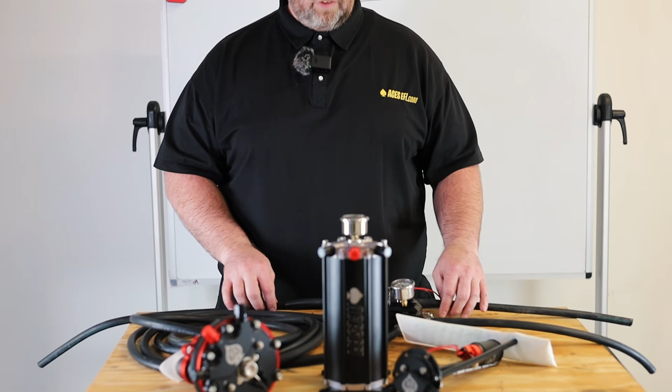We are talking about the fuel system part of this whole thing. Instead of just talking about the one that's in the Blazer, I want to go over all the systems we've got. So I want to give you this introduction, talking about all the different fuel systems we have and what we plan on doing in this video series. We're going to chapter it out to cover each one of the systems we offer here, and hopefully that helps you out.

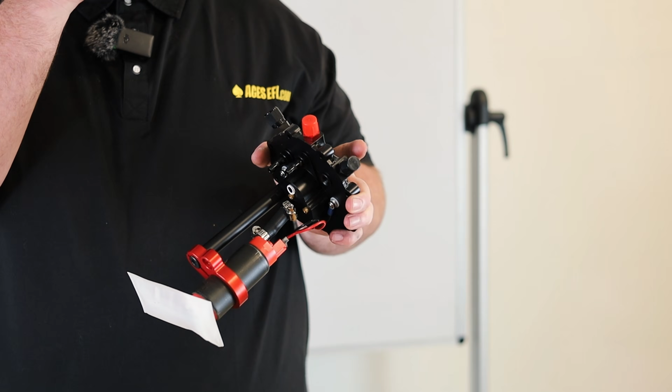The return lines as well. So we have one right here for vent, which doesn't have any kind of adapter on it. We've got the one right here that's kind of like a return situation, and then we've got the other return right here. So if you're using it in a different configuration that requires this return port, then this would be the return. So a lot of flexibility in this.

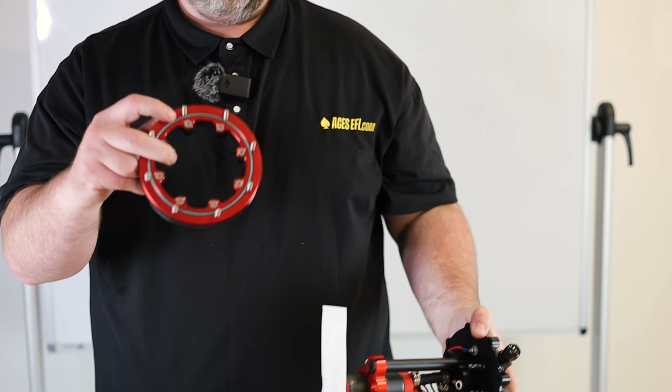With this system right here, you're going to cut about a 4 1/8 to 4.5 inch hole in the top of your fuel cell. This is really designed more for fuel cell applications, or if you have an old steel tank and you want to do the modification, you can just cut a big hole in the top of your tank, but you have to use this ring right here. This is the mounting ring, which, as you can imagine, goes up on here, seals to the bottom of it with this nice green O-ring, seals up real nice.

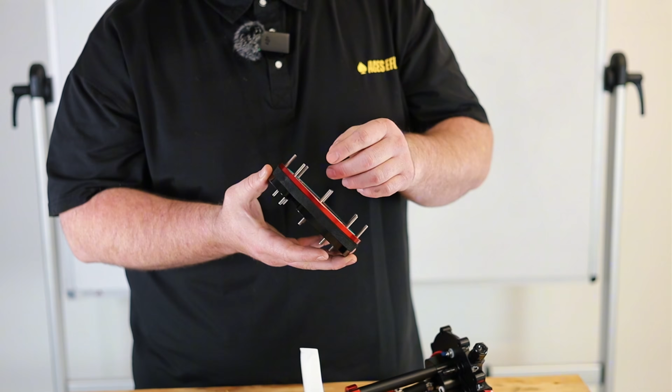Then it has this closed cell foam in here, kind of like a neoprene type material. So there's this ring right here that goes inside the tank. You can see it split, so you can actually get it down in there. You put the foam on top of it, make sure all the studs go through, no problem there. And then you go through and work each one of these bolts in with this right here to capture the top of the tank.

Now it can warp a smidge when it comes to the corrugation on top of the fuel cell itself. Like if you've got a stock factory tank, it has that little look like the bed of a truck back there kind of. But yeah, it can bend to that and seal up pretty nice.

So you'd mount this ring into the top of your fuel cell, and then you just install your pump through it, no problem, just like that. Put a few captive nuts on there, not a big deal. They have anti-rotation devices, so they're not going to shake themselves loose or anything over time. But you get it mounted in there, you get it about a half inch off the bottom of your fuel cell itself, no big deal.

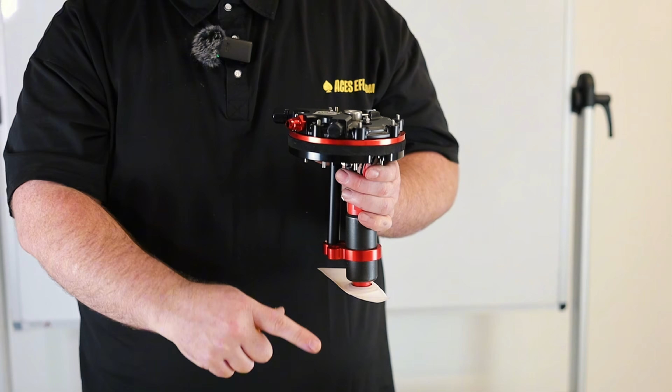And then everything else can happen. So you can go from this piece right here, straight out of this pressure port, which is regulated to 58 psi. No need for a return because it does it all internally. Hit a filter, go to your fuel injection system, and you're set. You need a little bit of power, but this thing only runs about 9 to 12 amps-ish.

You can actually run our system directly to this, ground it appropriately, and you're in business. This is simple. The biggest thing you have to do is get the depth right and cut a hole in your tank. Other than that, not too difficult.

You notice there's not a lot of stuff that comes out of that kit box. We didn't bring the whole kit boxes because we already have some line for our 255 system and our tight-fit tank system as well, which we'll go over later in this video.

When it comes to the fuel system itself, you're going to have your fuel cell right there. You're going to have this in-tank module oriented about right there, coming down. There's a fuel pump itself, the sock filter, and your fuel level. This is 0.5 inch right through here. That's about how this is going.

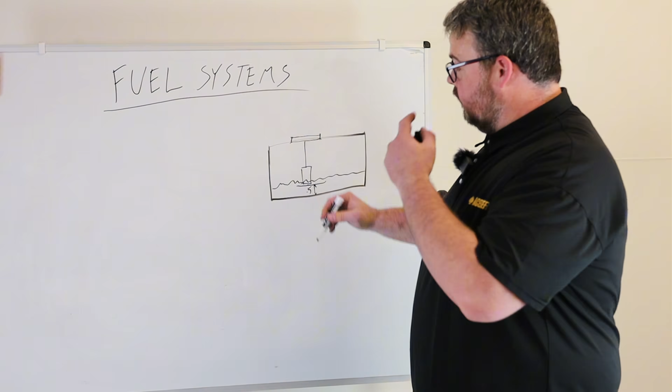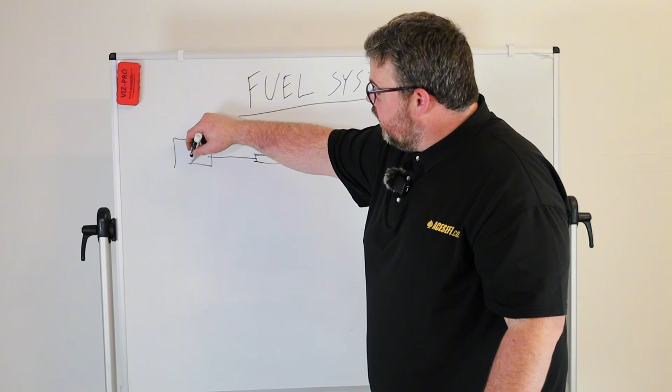Then you've got your pressure line that's going to run out of here, hitting about a 10 micron filter. The sock filter already on here counts as your pre-filter, before the pump, taking all the rust and debris you'll get in your fuel system over time. So we've got our 10 micron filter here, and then it's going to go off to your fuel injection system. Whether you've got a throttle body, fuel rails, or what have you, you can deadhead this whole system into your throttle body. So, TBI, there we go. We'll just say it's a kill shot, no worries.

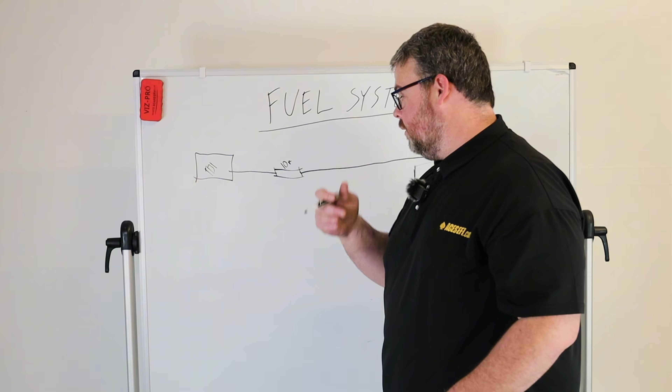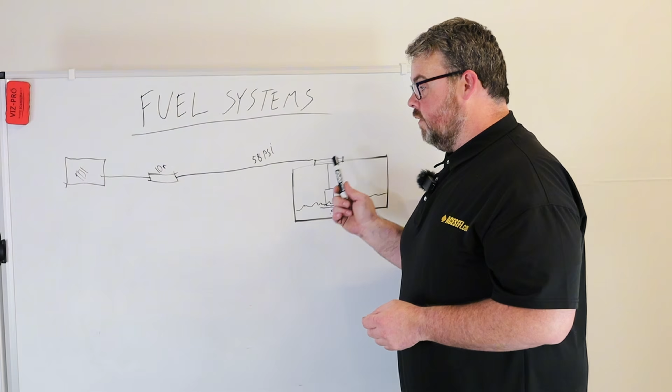This right here is going to be running at 58 PSI. Some of our systems are already preset for 58, some you have to adjust in the handheld. Really easy, under the fuel selection tab, you just go into basic, find injector rated pressure, adjust accordingly, and the system will take care of the rest for your fuel pressure needs. So this is easy, from one point to the next, good to go.

No worries. There's not a whole lot of other mysteries with this particular system because it is so easy and basic, other than you've got to cut a big hole and get the depth right, and make good selections for running your fuel lines around your vehicle. Up next, I'll be talking about the Fuel Command Center, which is this thing's big brother in a way. Let me go grab that real quick and we'll get to talking about it.

So anyhow, we are back. A friend of mine commented and said he didn't like my plywood table. Look at my plywood table, it's to hold things, this is great. We're in a shop, I'm explaining things. It's not really the focus, is it?

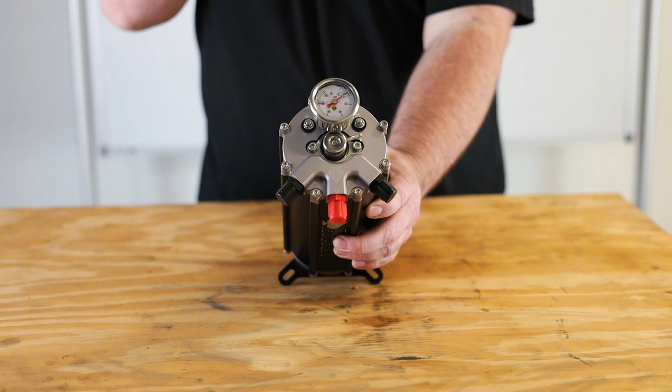But we're back about the fuel systems here. We already talked about the conversion module, which is fantastic, a huge fan of that. But now, if you shrink one of those up just a smidge and give it its own fuel tank, that's exactly what you get in this right here. You can see it's just got hold down bolts, and if you take the top out of this thing, it looks just like the conversion tank.

So you still get the return if you're going that direction. You still get the pressure, you still get the vent, all that stuff. It's whatever you want to be doing. But this thing has a few extra bits and pieces that I like quite a lot. You can mount it under the hood like this, standing up, looking good, running this off to your fuel injection system. This side or this side, whichever you want to do. You'll run it from your mechanical pump or an inline electric pump off your original carbureted setup into this to fill this tank up, this surge tank as it is.

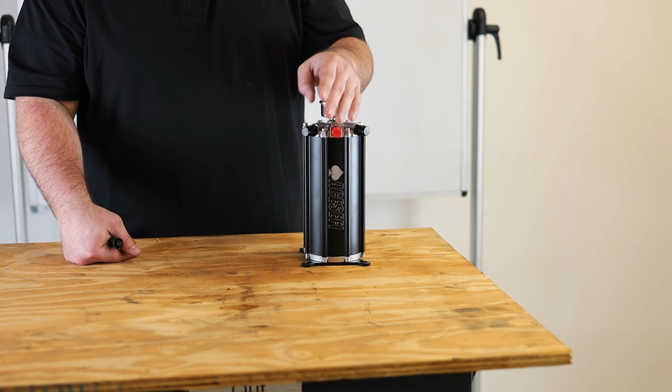You fill this thing up, it takes the fuel pump inside, which I believe is a 340 liter per hour, really spicy pump, puts 58 PSI out to your throttle body or fuel rails, no problem. Then you'll have a return on this side or this side, depending on how you have it set up, back to your fuel tank, because this is just going to be feeding fuel in and it needs somewhere to go. This is going to take exactly what it needs out to go to the throttle body at a higher pressure, because it may be 7 to 14 pounds coming in here, 0 to 5 PSI coming out of here depending on tank restrictions and whatnot, and then 58 PSI coming out of this right here on this red one, this pressure port.

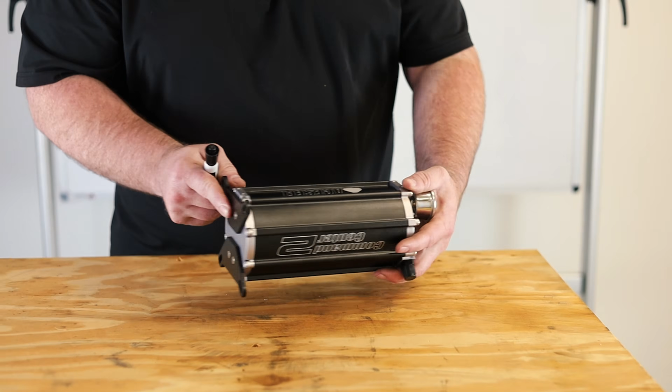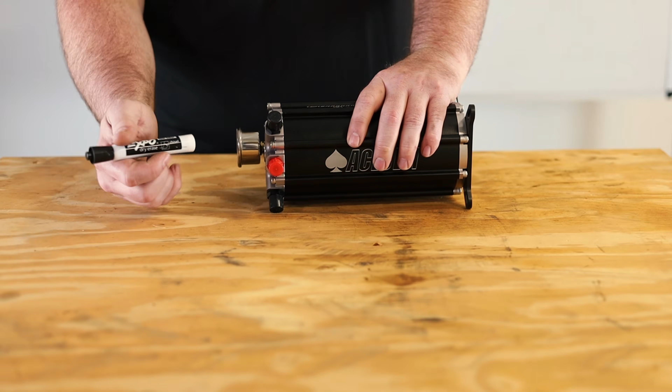You can mount them vertical like this, which I'm a big fan of. But because of the bolts in the back, you can take the feet off this thing, unbolt them, put them here, and mount it horizontally if you're real limited on space. The only thing to consider is this is still your pressure and fuel feed to fill the tank, but whichever one is the highest point needs to be the return, whether it's this direction or that direction. That's the biggest consideration.

Also, if you want to get real fancy, depending on the location, you can take this gauge off and put a fuel pressure transducer in there, get all your fuel system pressure, and feed it right into your Killshot or your Jackpot or whatever you're running. Then you just use the gauge somewhere else if you want to. And it's got a really cool Aces logo in there too, I like that a lot.

Usually when I take these out when I'm doing an install, I just kind of keep them in my drawer because I like them. It's just a thing I collect. It's really weird, I know.

But there's that. Also, I didn't mention this in the last one, but this one still has a boost reference port, the 1-to-1. So if you're running this with a boosted application, you take a reference line off your throttle body or intake or whatnot, and run it to this, so every 1 PSI of boost pressure gets you 1 more PSI of fuel pressure out to your throttle body, keeping the injectors nice and even as it goes.

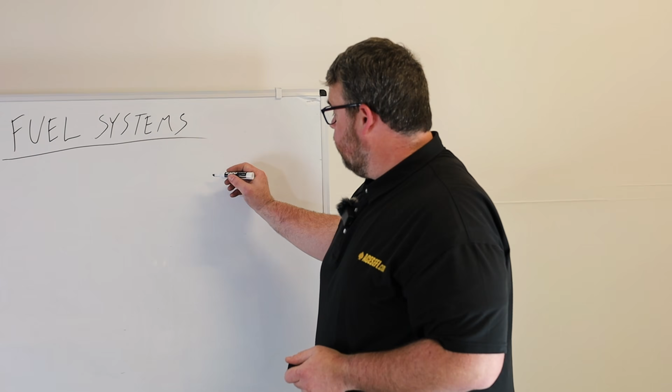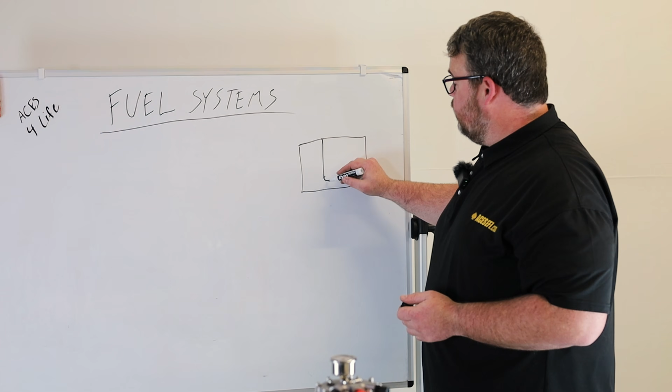So we're going to have your fuel tank. This is your factory fuel tank right there. You're going to have a line coming in, so this down here is going to be your pickup for the fuel tank itself. It's going to come out and go to your engine. That is a very square engine.

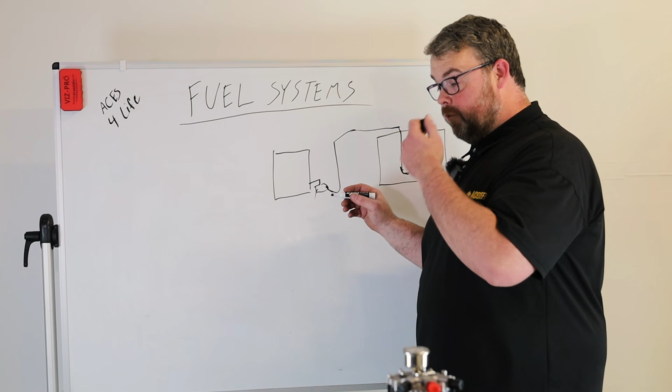But anyways, on the side of your engine there's going to be a mechanical fuel pump, with a few lines coming off of it. This goes in here, and normally the mechanical fuel pump off the engine will go back up and supply the carb up here, supplying it with about 7 through 14 PSI of fuel pressure. Because we're getting rid of the carburetor and going fuel injected, we're going to get rid of the carb and add some EFI on top of it.

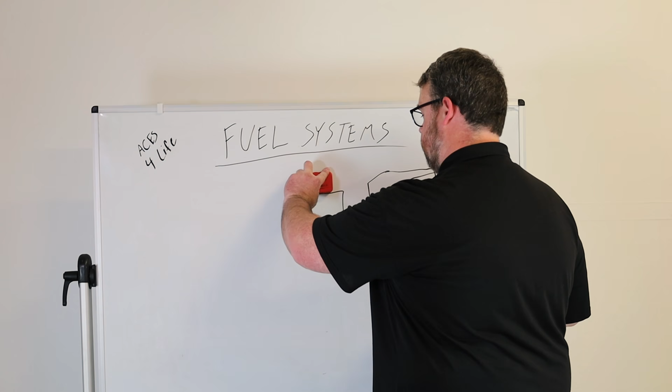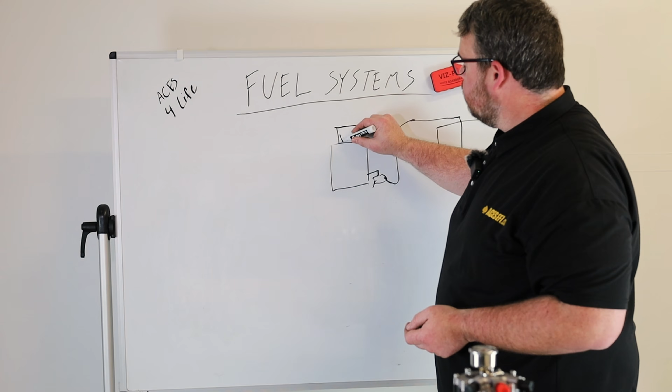Finest of artwork. Anyway, so now we're going to put EFI on top of this thing. Let's say TBI - that's going to be my generic term for anything ACES fuel injected related, unless we're talking about the Jackpot, which then we can just add some fuel rails to it.

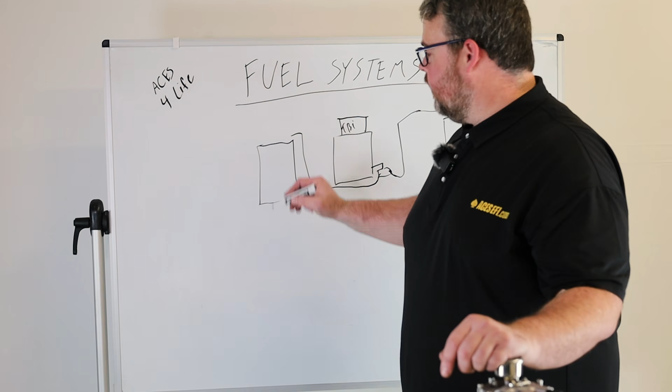Same principle applies: you're going to have 58 PSI coming out of this. So you go from your tank to your mechanical pump, and it's going to go over here to the surge tank. That is this guy right here, exact, right - it's the same shape.

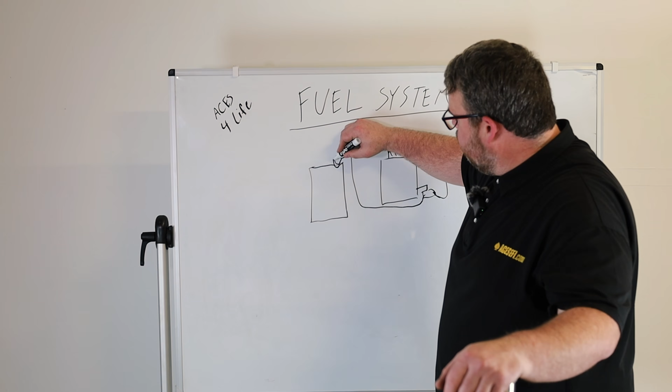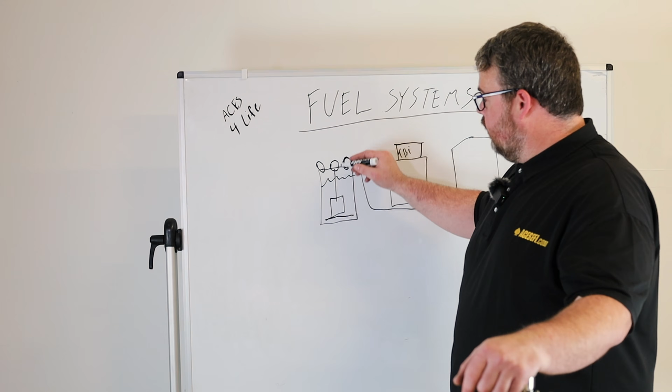We're going to have one port over here, a port right here, and a port right here. This one is going to fill this tank up at 7 to 14 PSI - just free-flowing fuel in there, no problem, doing a good job. And then the pump inside here is going to have a little sock at the bottom too, picking this fuel up and increasing it to 58 PSI.

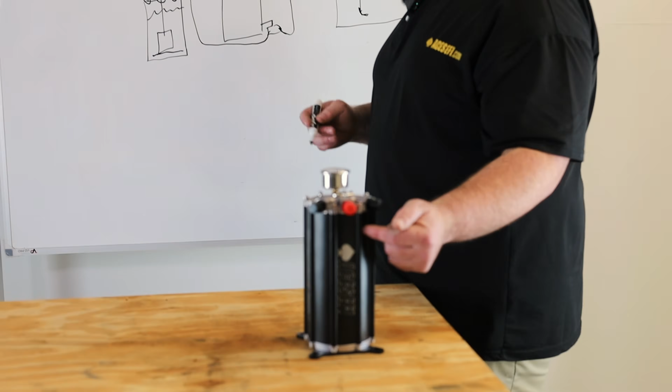And it can go deadhead because it has the regulator built into it - any return action it does is internal. So it's going to have like a weird combination of a bypass regulator inside of this thing, that's the regulator right here on top. That guy.

So anyways, we got 58 psi going back to the TBI unit. No problem, set it up in the handheld. We got a Kill Shot Classic, it's already set for that. We got a normal Kill Shot, we have to adjust it a little bit. We got a Jackpot, we got to adjust it a little bit.

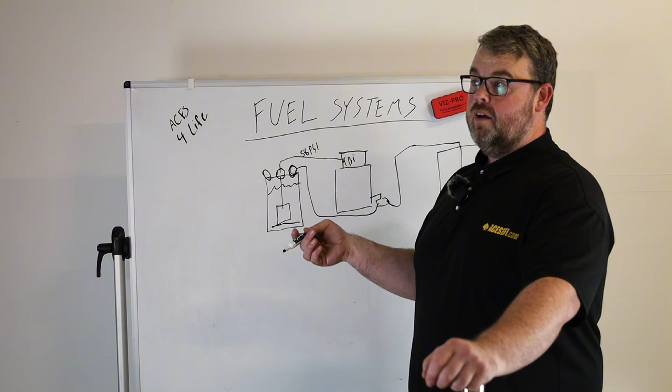Not a big deal. Even if you don't adjust it, it's only a marginal difference in fueling, which it will learn out eventually. It won't change the pressure for you, but it will compensate the fuel in the right areas, if that makes sense. But anyways, we got the return. The return is going to come out, and it's going to go back to the tank, preferably somewhere low in the tank so it doesn't cavitate the fuel.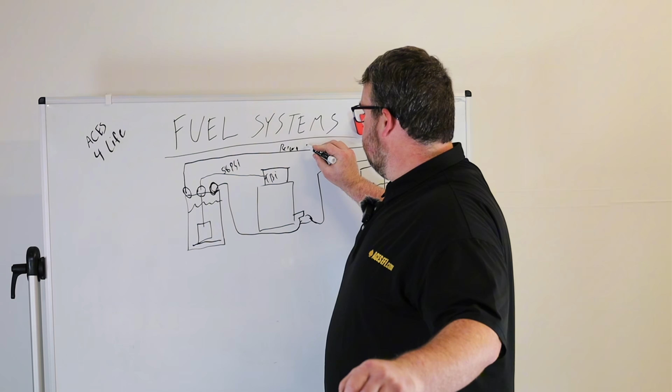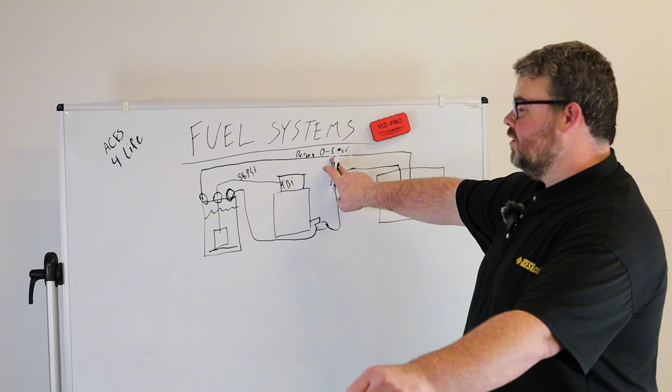I'll even put little wavy lines in there. This right here is return, and it should be nowhere beyond 0 to 5 psi of restriction. Sometimes people will put these things in and it'll act real funny and do stuff because they have like 30 psi of restriction on the return line because they took it to the wrong port over here, which is a rollover valve. It kind of turns into a really neat shower inside, but has a huge amount of restriction. So even though there's a big 3/8 line on top of your fuel tank, make sure it's not for a rollover valve, because that will, weirdly enough, make it run funny and give you a little bit of a headache doing the setup. But hopefully that makes sense.

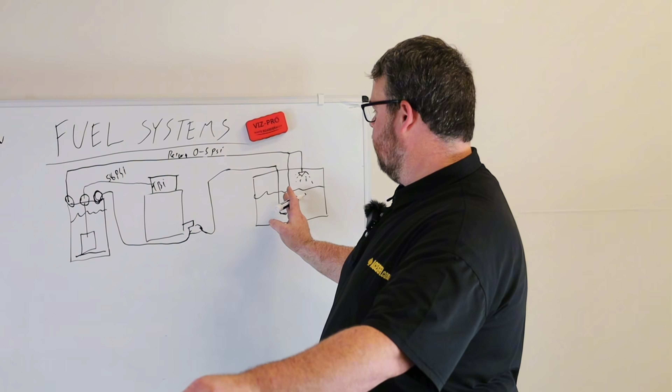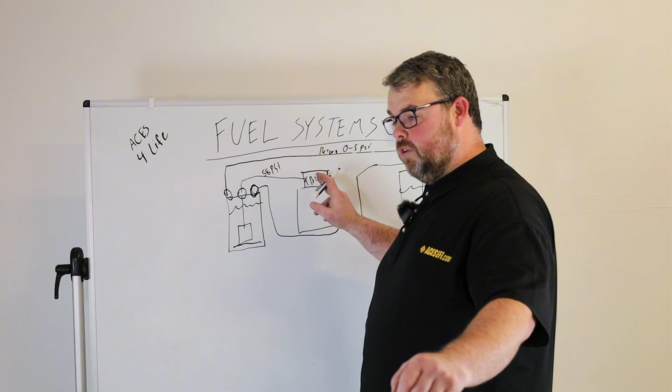Your factory fuel system up to your mechanical pump, no problem. It could be an inline electric pump, also not a problem. That's going to feed this and fill the surge tank up. It'll get regulated to 58 psi that goes off to your fuel injection system, and the return line goes right back to the tank. It runs under the same amperage range, about 9 to 12-ish amps, so not a problem. You can hook your orange fuel pump wire right over here to the positive leg, and you can take this and ground it, preferably to the battery if you don't mind, but a good ground source, and it'll sit there and do its job. So with that, that really sums up everything that's going on with this particular unit.

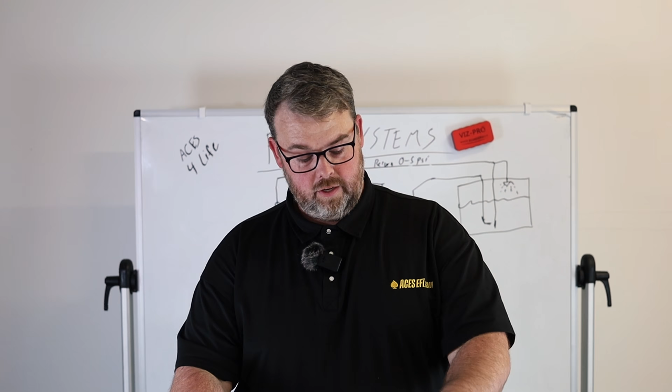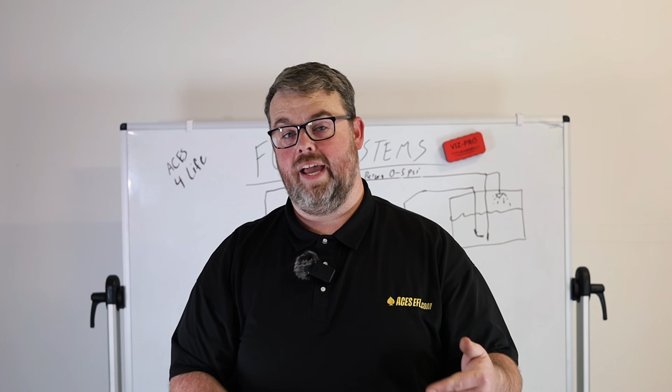There's not a lot of extras. There's no weird mysteries about it. It just, if you got it horizontal, you need to make sure there's a port that's going full return back to the tank that's the highest point. Otherwise, it'll get a little bit of air in there. That's it. Everything else is pretty easy.

I've seen people mount them on frame rails. I've seen people put them horizontal or vertical on firewalls and a bunch of other really weird spots. I even seen somebody put one in the trunk of their car and then run a line all the way to the front of their vehicle, which they had no issues with. So they kept it all real tidy back there in the trunk, which if I was doing that, I'd just go with the fuel cell and use the other kit.

But hey, it's up to them. They're going to be doing this. It makes more sense to them. Let them do it, it's totally fine. We're just here to support it, give you as much information as we can about it.

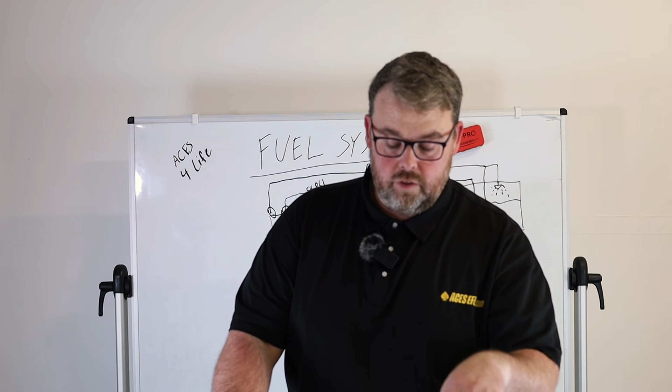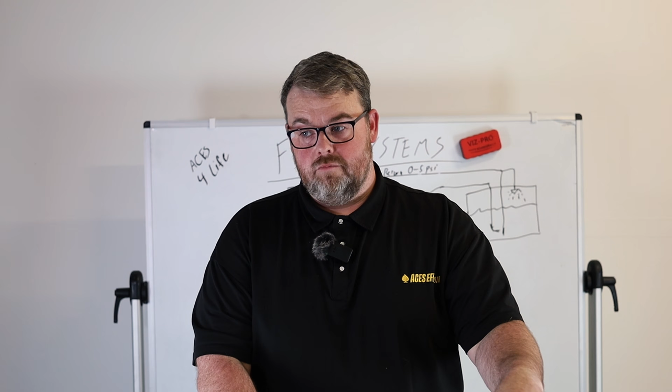Really neat thing is if you take the top off of this to inspect it, to maintenance it or whatever, it doesn't void any warranties removing these screws and taking the top off. So that's a huge benefit. We're not going to be like, oh no, you touched the screw, we can't warranty it for you. It's like, oh hey, I took it off and I found this issue, or I found this thing, or what can I do about this? Because later you may decide to put a bigger fuel pump in here, modify it accordingly, and put the lid back on it. And that's up to you to do if you want to.

So it's just a normal old in-tank fuel pump is the normal size. I mean, you really want to measure the diameter, but yeah, we give you guys a little bit of freedom with this unit. Big fan of it.

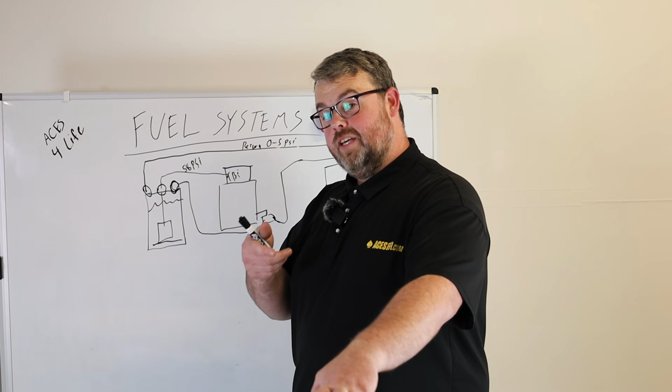So with that, if this is making sense, if I explained it well, let me know. If I didn't, let me know. And I can always come back and do either a reshoot of this section of the video or just make a more in-depth explanation of what I got going on here. But hopefully we can film in the future a lot more examples.

Hopefully I'll get the chance to do an install video on one of the ACES test units, showing how I like to hook it up and some of the things I go through when installing these. So we'll get on to the next portion of the system.

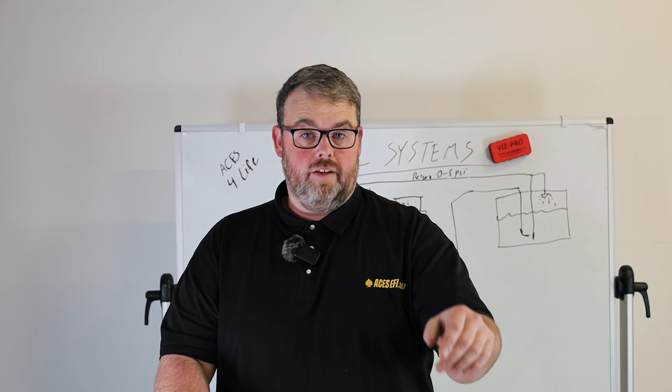It's time to start talking about fuel pressure regulators, lines, and inline fuel pumps. So hang out with me for a few, we'll get into Segment 3 of this fuel system video. I'm so excited to be making these things because it's information that people need, and it's epic. It's not often that I get the chance to just sit around and explain this stuff, other than in-house and a couple short YouTube videos.

But let's get to talking about the tight-fit in-tank fuel pump. If you've got an EFI aftermarket tank for your 1972, whatever it is, it's going to have 6 bolt holes in the top of it - see that guy right there? It's the same bolt pattern as the majority of EFI conversion tanks out there. So you should be able to get one of these for your conversion tank, figure out the depth, cut these things appropriately, get the hose just right, and just send it.

This is also one of those nice closed-cell technology sock filters, so it does a really good job of not collapsing and not getting clogged up too much. And since it's in the fuel in a few different spots, it can actually pull the fuel through nicely without starving the pump when you're super, super low on fuel.

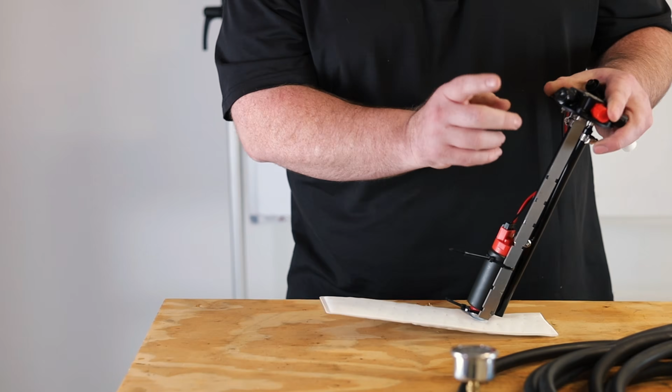This thing right here doesn't have an internal regulator because there's not enough room in the top of it, but we did throw some options in. On this side we have the return, which comes with a nifty little cap. Over on this side we've got the vent. We keep an AN cap on there because some people already have a vented cap or some other means of venting their system. But if you don't and just want to get an AN fitting and a bit of fuel hose to run as your vent, you sure can do that.

Also, this is the pressure out. It picks it up from the bottom of the tank, depending on your depth - like 12 inches like this - and sends it out. This is full authority of this particular pump. This is a 255 liter-per-hour pump, your standard issue in-tank 255, good for EFI up to about 600 horsepower. All these fittings are -6 AN on all of our stuff, so that's keeping it fairly universal - 3/8 line or a -6 line, -6 fittings.

These are ORB on this side and AN on that side. If you ever have a different fitting you wanted to put in here, not a big deal - it's just an ORB, O-ring boss, that's what ORB means. This thing right here has already got the pre-filter in. You need to get a 10 micron post filter as close to your fuel injection as possible and run it through.

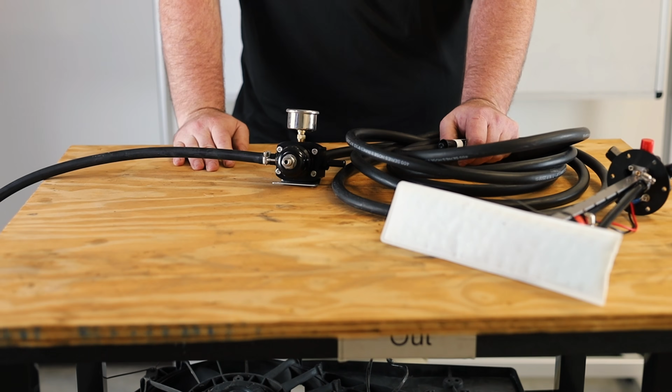So I have a bit of hose here - let me put this down - and a regulator. This seems to be a bit of a thing for a lot of folks, getting the regulator set just right. Let me push my cart around a little bit and really help the camera guy focus. Anyways, so for instance, you see this long bit - let's get it flipped around correctly.

This long bit of hose right here is actually coming out of the return. These ports on this fuel pressure regulator - it's adjustable and has boost reference. It has a 1/8 NPT threaded area right here for the gauge, or our fuel pressure transducer. Actually most pressure transducers on the market will also thread into this as long as they're 1/8 NPT. Not a big deal, right?

So anyways, let's see - no, I actually tightened that one, I was going to unscrew it for you. But you can have pressure coming in here, or pressure coming out of here, or pressure going in or out on this side - these are I and O on each side. So depending on how you've got it arranged, as you can see, this was set up in a return style. So in a return style, that would be fuel pressure coming out of the pump, going through the filter, through the rails, through the throttle body, or whatever setup you've got.

Like if we was to do it on the Blazer, it would go through the rails and then come back through this line right here to a regulator, which will be the restriction in the whole system, where you adjust your fuel pressure at. If you want 43, you adjust it for 43. You want 60, you adjust it for 60. I made a tech short on this recently about adjusting this.

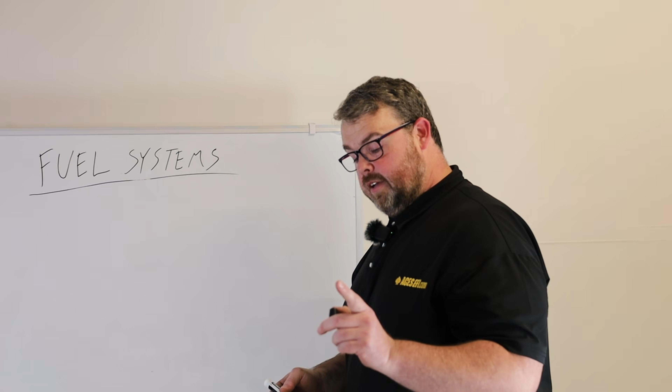Now, if we were going to draw that out, I'll do that. I'll just draw it out, then I'll erase it, and we'll go on to the next configuration of it. Too easy, right? So we got in-tank fuel. Let me draw my fuel cell right here.

We got the tight fit in-tank. We got fuel pump right there. We got that right there. Fuel pump, FP, right there. Anyways, we're going to be coming out of the red one, which is going to be putting fuel out, so we're going to go this direction. There's going to be another filter. This is that 10 micron right there.

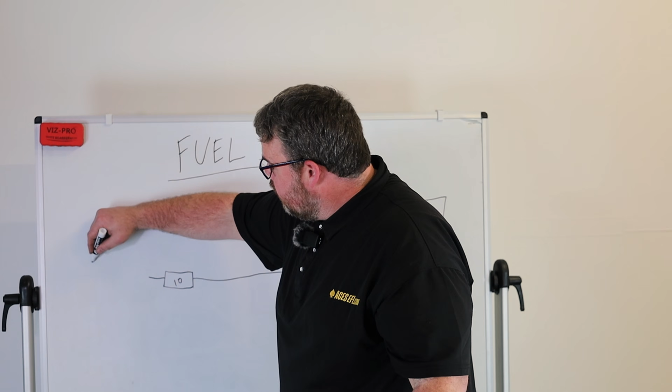And we're going to go into, let's draw fuel rails this time. I want to have a little bit of fun with this because I'm such an artist. We're going to have fuel rails right there. There's going to be a crossover connecting them. This actually looks more like a spaceship than anything else, but it is what it is.

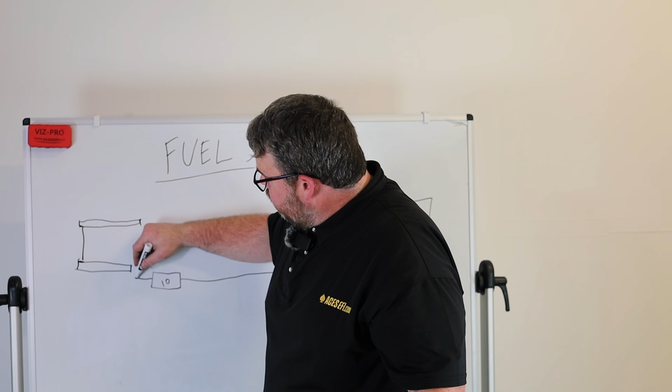So our fuel system will go right here. The fuel is going to go through this system, this direction. It's going to go through the crossover. It's going to come back through the other side of the fuel rails, where it's going to encounter the fuel pressure regulator, FPR.

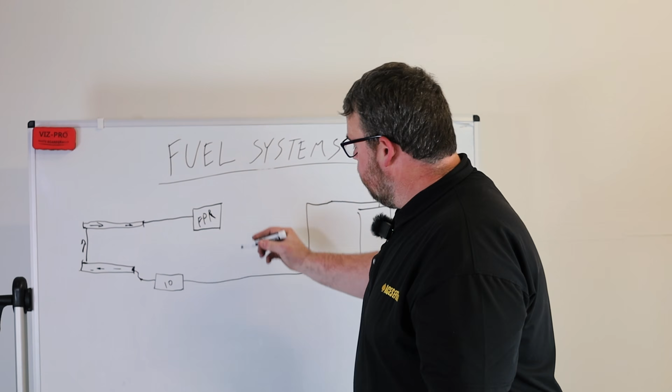There we go. So this side right here is blocked off. This one has a barb fitting in there, so you just use your imagination, really. And then our fuel return is going to come out of the bottom, and it's going to go back to the tank, to the bottom of the tank.

You want your fuel returns on these type systems to be in the bottom, because if it comes in at the top, it's going to actually just drop the fuel in, which will add some air to the system, which could cavitate your pump in a high horsepower application, cause some damage to the pump and or the system, causing fluctuations in fuel pressure. Yeah.

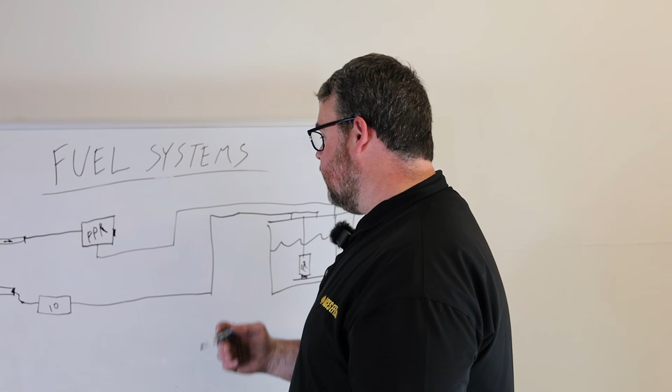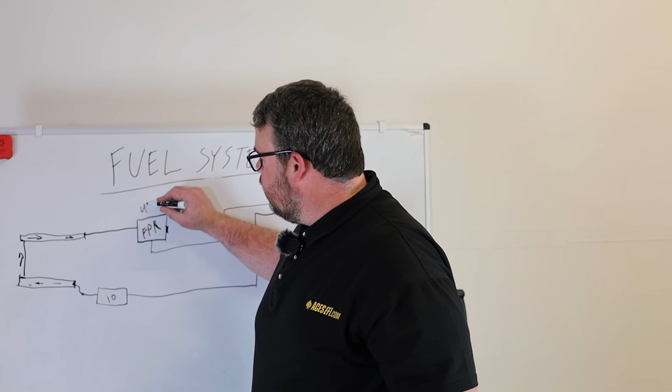But it comes out of the tank, comes out of the pump, hits the 10 micron filter, goes through your rails, comes back around, hits your fuel pressure regulator, which we adjusted to 43 psi, 43.5 psi right here. That's what we got this one adjusted to. Too easy, right? Anything else is going to come. This is the pinch point. This is a restriction, so it's going to be at 43.5.

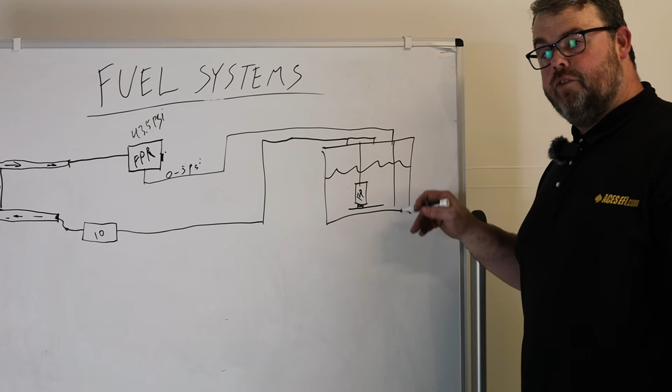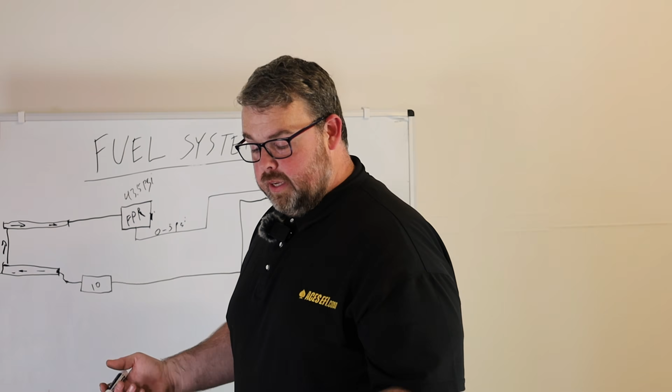Anything else is free flowing the best it can from 0 to 5 psi back to the tank, where it's just going to gently go into the fuel that's already in the bottom of the tank. They usually call this a dip tube, DIP tube, because it dips into the fuel. A lot of times people use bulkhead fittings and AN lines and all that. Whatever means of return you got is going to be good. Preferably you're returning the fuel below the level of the fuel.

That way it doesn't splash around and aerate the fuel a bit. So that's the return style right there. This is a return style setup.

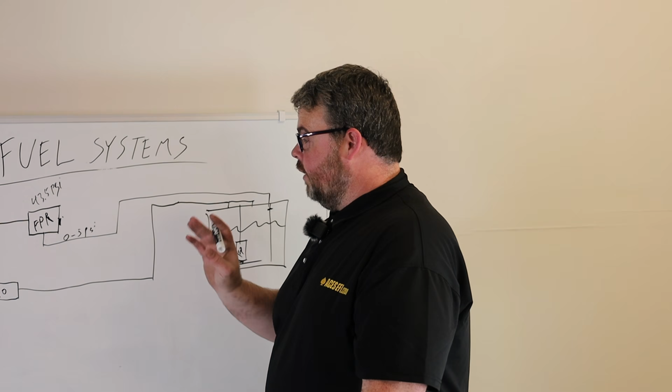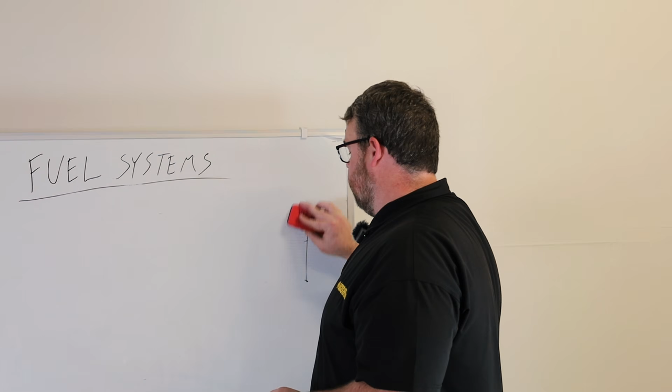We got a pretty good graphic in our manual, but the next variation of that is just a little bit different. So let me get the eraser out and I'll draw you a whole nother thing. And this actually applies not only to this tight fit, but also to the inline pump. Let me grab that inline pump real quick.

Please hold. So if you're not going with an in-tank setup, you're going to be using this setup right here. This is just inline. Actually, I got it backwards, so it goes this direction. Fuel goes that way. This right here, good, tested good. This is just one of the tester ones I had laying around. It's got some damage, but it works good.

Anyways, this applies to this and this for both of these style setups. The only difference is this one's in the tank, this one's inline. So not too different, but some folks may get confused because one's outside the tank, one's inside the tank. Principles stay the same. So with that, let me talk about the bypass return style setup.

This is a bypass return regulator after all. So when you're doing a bypass return style setup, which this is almost set up for, you'll have pressure in, pressure out to your EFI system, which will deadhead to it, and then it's regulated and goes back to the tank. So all your tank business comes up to here, and then this goes off to your system, whether it's a TBI or fuel rails or what have you not. Not a big deal. So let me draw that out real quick.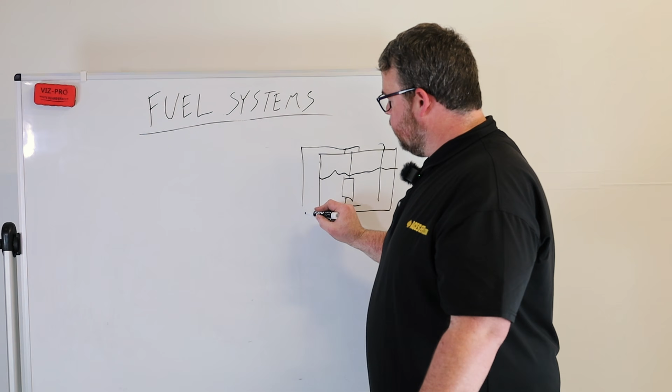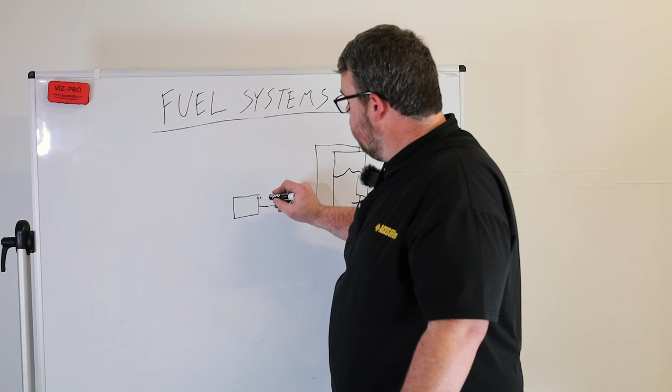And then we're going to hit the fuel pressure regulator. I want to put it right about here. So here we got the fuel pressure regulator right there. So we got the fuel coming into it just like this. We're going to have the fuel coming back out of it just like this. Let's go all the way around the fuel tank to do our return. How about that? That way I don't have to jump any lines.

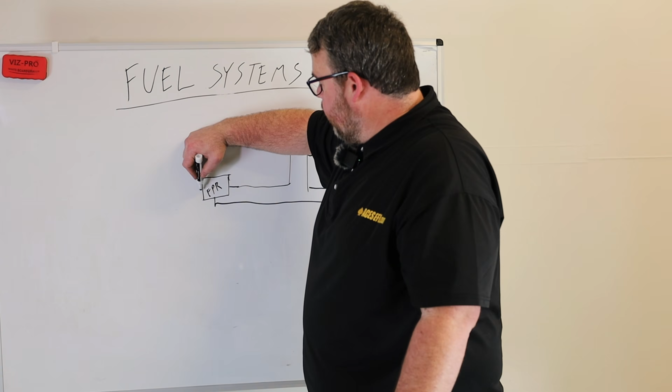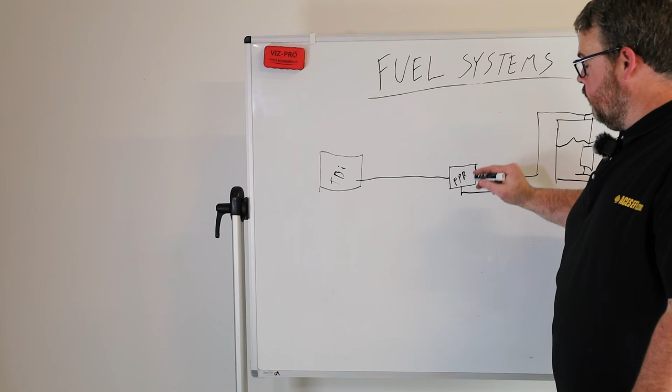So we got the supply to the regulator. It is regulated down, and then we're going to come out of the regulator to our fuel injection system over here. We're going to go back to TBI just to keep it fresh. That's deadheading into it. This line right here, because it's regulated at this bypass return regulator, is going to be 58 PSI if we adjusted it to that.

Or we could keep it at 43.5. It's up to you depending on what your goals are. This right here at this return, it's still going to be 0 to 5 PSI. And this is going to be maximum authority of what that fuel pump can do.

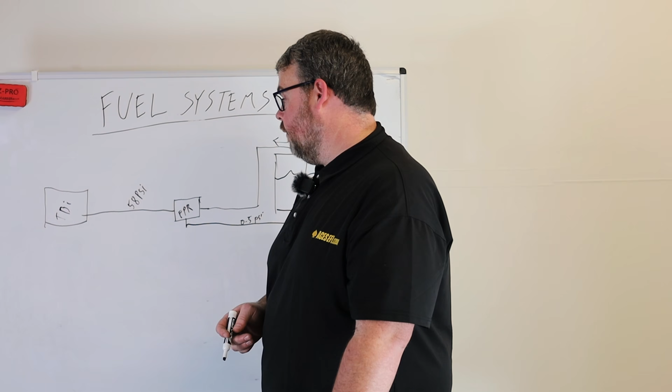This also changes where you put your filter too, because a lot of times you want your filter, you can put it here before the fuel pressure regulator, but depending on where you mount the regulator, you want that filter as close to the throttle body as you can so that any debris inside the lines over time doesn't get clogged up in your injector screens, causing weird stuff to happen. So keep that in mind. You want your filter as close as you can get to the system as possible.

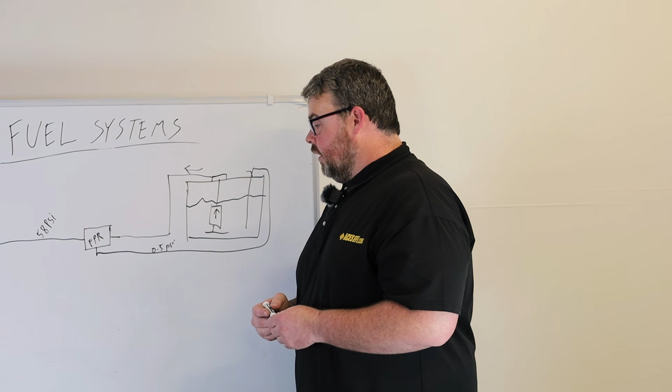It can be before it, it can be after it. It's not a massive deal. Preferably as close to the throttle body or close to the fuel rails as possible to protect those injectors. So this is a bypass return style. Not too bad, not too complicated. A lot of people kind of pipe it in funny, but this is it.

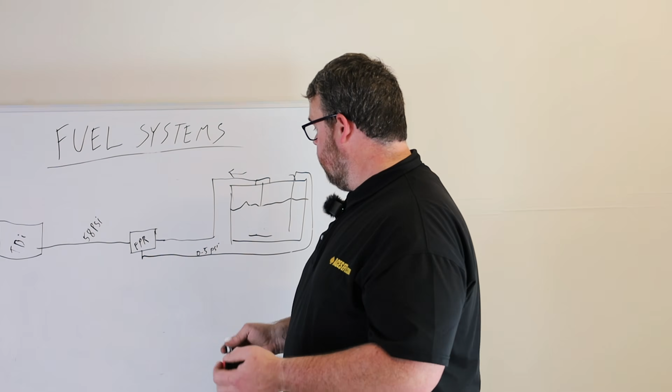If we're coming out of the tank with that in-tank fuel system, it hits this, returns back to the tank, no problem, goes deadhead out to your throttle body setup. Now, if you're doing, for instance, the inline pump, there'll be no pump here, and there will also be no sock filter here either, because you'd have to have a pre-filter. So you'd have your fuel pump before the pressure regulator, and then you would have your filter, your 100 micron filter, before it as well.

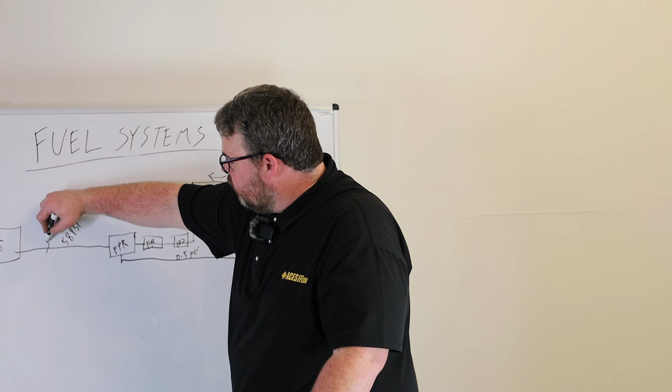100 or 40, a lot of people use 40, whichever one you're using. But this will be your fuel pump at that point, and this will be your 100 micron filter. Then you'd still want to put your 10 micron filter as close to the throttle body as possible.

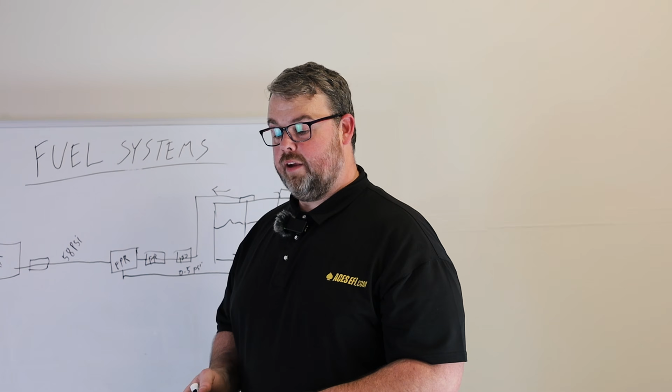That's the variation between using a tight in-tank pump and an inline pump: it's just literally moving the pump from in the tank to inline with it. It just has to be wired correctly. They have about the same amperage rating. This one's obviously a little bit beefier and heftier, and it does use a little bit more amperage.

That's it, these are also louder. I like these because they're in tank. If you're in a pinch, you can buy this at the auto parts store, just pull the thing out and replace it if it goes bad at some point. So not really too bad. I like these a lot better. These are just fine, I've used a lot of these as well. Not a big deal.

So with that, I would go over the whole inline fuel system as well, but it's so closely related to this that it's not really necessarily worth talking about all the variations, because it'd be the same thing. The difference is this comes from the tank with a factory dip tube to supply the fuel. It needs to be gravity fed, where this one doesn't need to be gravity fed.

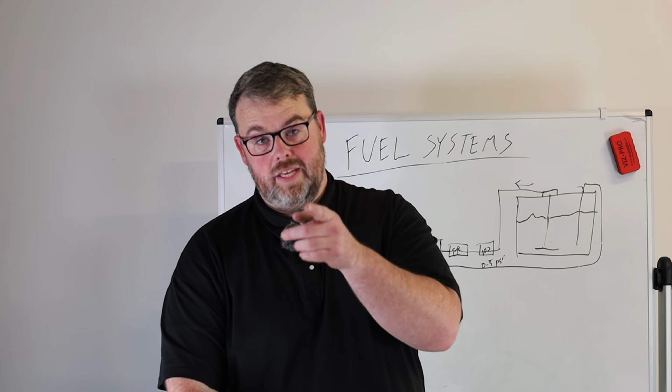So you want to have a good supply of free-flowing fuel to the pump so that it can send it, because all aftermarket electric pumps are pusher pumps, not puller pumps. So if you're pulling the fuel out of the tank with one of these inline pumps, it will eventually destroy this pump, unfortunately. There's very few aftermarket industry pumps that will actually pull the fuel out of the tank successfully, because it's designed to push it up and be EFI rated at the same time. You cannot use a lift pump before it.

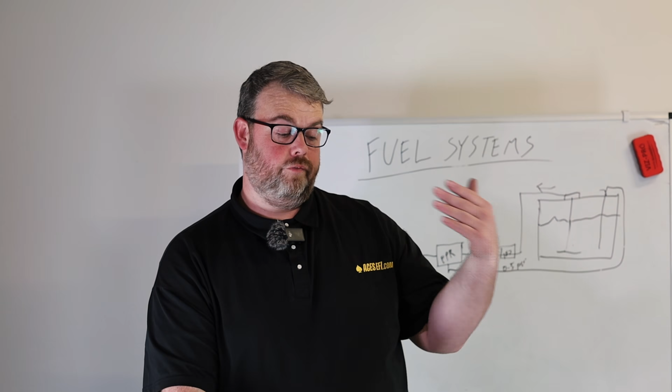You can't use your factory fuel pump at 14 or 30 PSI to supply your 255, because of flow rating. It's not going to have a good through-flow rating to be able to supply this pump with enough volume to get the pressure to supply your fuel injection system without huge horsepower limitations. Normally what happens is idles great, runs great, hit 3,000 RPMs, falls on its face, runs out of fuel.

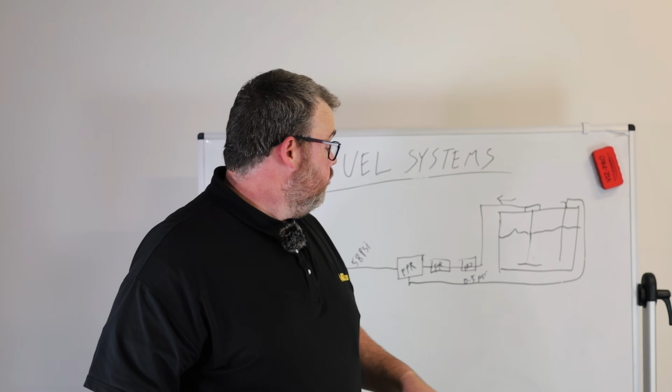So that's kind of what we run into there. So it has to be free flowing, has to be gravity fed, the lowest point possible. That's why I got the pump in the diagram down here, because this needs to be able to siphon feed in. It needs to be the lowest point on the tank, if not below the tank, that you can get. Hopefully that clears that up.

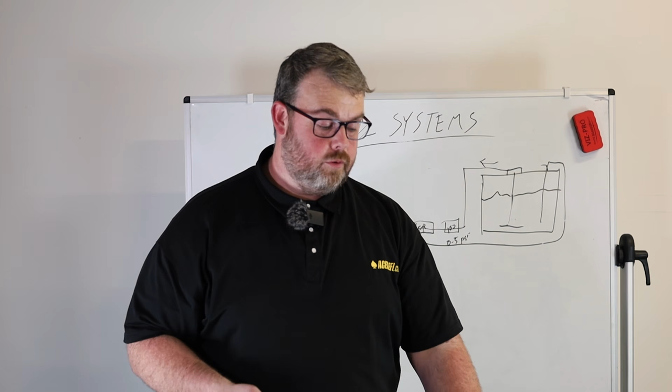But we talked about the return system, the bypass return, in-tank, in-line, and some of the requirements. This one's another good one too. If you got a fuel cell, it comes with the same closed cell neoprene style gasket with the retaining ring too. So you can actually cut a hole in your tank or in your fuel cell itself and install this in the same method that you could with the other system, the conversion kit.

So plenty of options, hopefully this information does you guys good. I know we get a lot of questions about fuel systems, how to hook them up. We don't have good instructions for it, we don't have a diagram for it, what have you not. They do exist, some of them are in the manuals, a lot of them are online under our documents section.